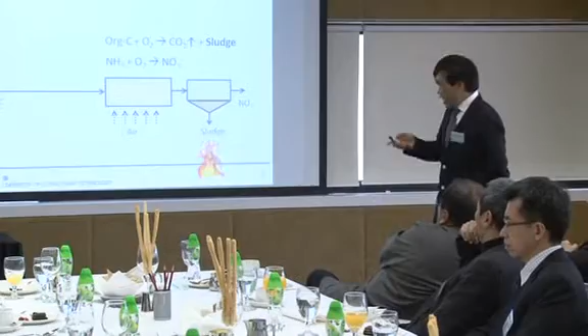Now, I'll give you the background of the innovation. What is the SANI technology? What is the beauty of this SANI technology? Look at the history of the development of 100 years of biological treatment technology. Biological treatment is the main technology of large-scale industrial wastewater and domestic wastewater treatment. The technology was invented by 2 British engineers in 1914, using a very simple, natural way,

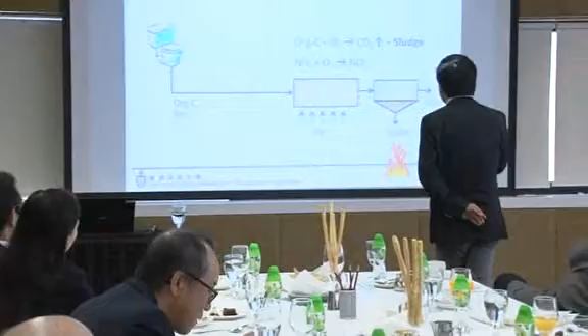pumping air to provide oxygen to oxidize organic pollutants, the major pollutants discharged from us, and to convert organic matter into CO2, which completes the natural cycle. Okay? It's a good idea.

But the problem is that oxygen hardly dissolves. A lot of air is pumped inside. In Cantonese, sai, wasted. Only a few percent is working. Most of it is just wasted. It just goes through without making any contribution. That's the reason it's expensive.

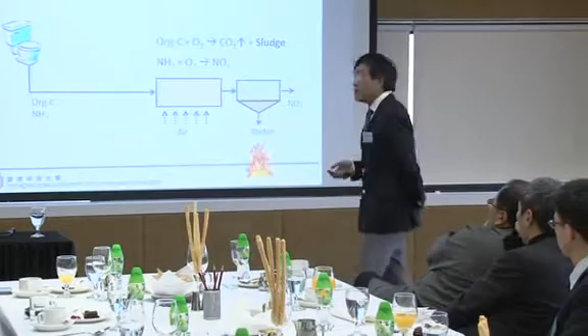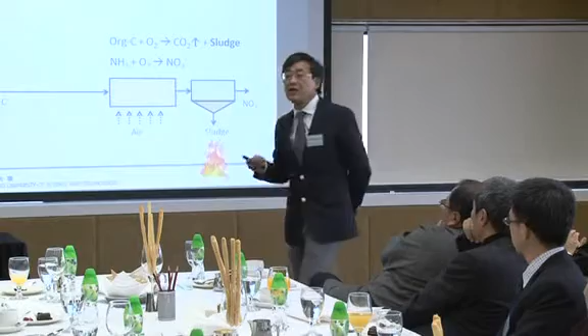Secondly, this conversion, no matter what you do, can only convert 40% of carbon into CO2. The 60% of carbon will stay in the form of sludge. So this conversion is not a beautiful conversion. Energy intensive and half-baked. But it's a natural reaction we know. We can do it easily everywhere, so the technology has been used everywhere, and we know the problem.

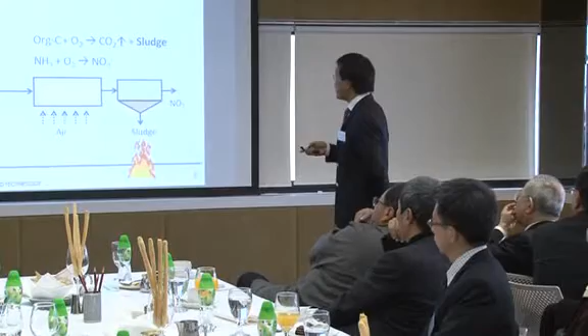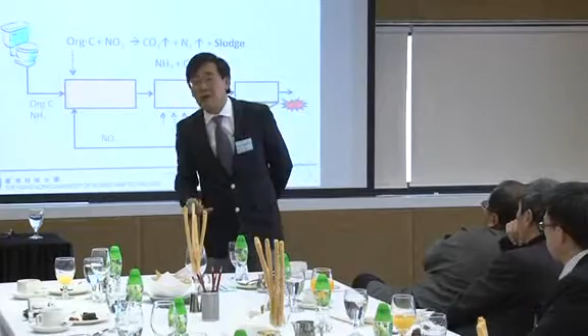And by 1962, a few professors invented another new thing that we can add on: removal of nitrogen, because nitrogen is another major pollutant to our water bodies, causing algae blooms, excessive algae growth. So we can add to this reaction, again using organics, denitrification to bring nitrate from ammonia back to nitrogen gas. Again, it's the nitrogen cycle, a natural reaction.

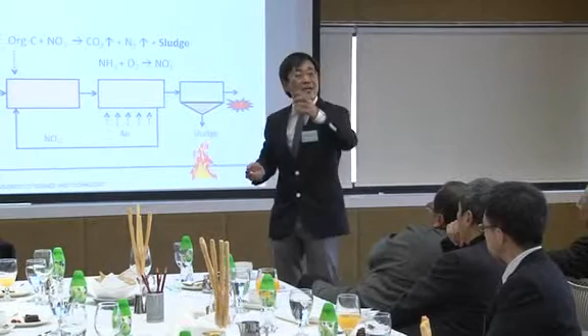And this reaction cannot solve the problem because we still use oxygen. And this reaction again produces a lot of sludge, same as the organic oxidation. Okay?

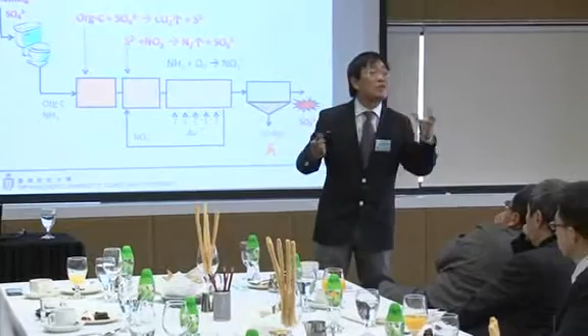Because of this practice, we realized in 2002, can we do something to maximize the benefits of seawater toilet flushing and get green technology developed? Now remember, seawater toilet flushing brings a lot of sulfate into our sewage, causing problems, smelling problems. That is the bad side. We want to turn the bad side into a good side.

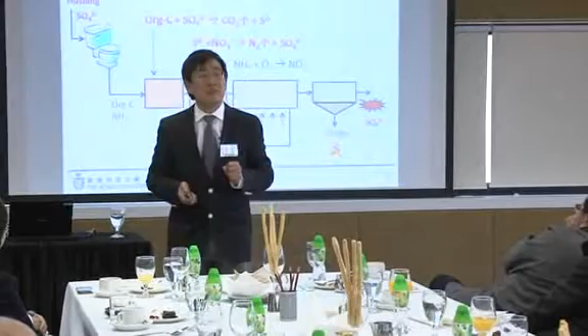Now, the idea is that sulfate can convert organic carbon into CO2 very efficiently. That's the reason we have smelling problems everywhere in sewers. This knowledge has been with us for many years. Of course, you tell me it's already known. Anything new? The new thing is that we can convert this with sulfate into CO2. Why won't H2S be produced? No smell. So the beauty is here. I'll show you later why. And that's what a lot of people forgot.

So when we searched the patents, there are a lot of patents, but none of them hook up to seawater toilet flushing, saline sewage, salty sewage. The product can be utilized in a reaction for denitrification to convert nitrate to nitrogen gas. So we are completing the carbon cycle and nitrogen cycle without being bothered by oxygen. We don't need oxygen. The oxygen here is not from air. You don't need to pump a lot of air. You know what I mean? You solve the problem from the root.

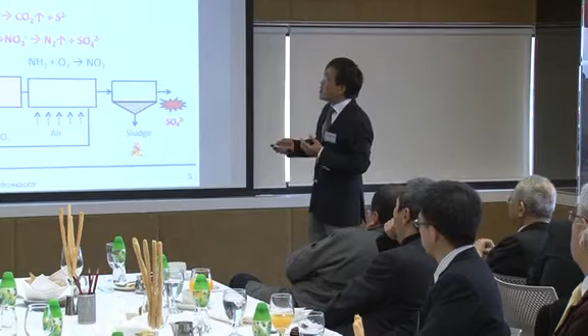And this cycle produces almost no sludge. That's good. I'll show you the reaction equations later. So with this simple idea, making use of sulfate originating from the toilet flushing practice, we can turn wastewater treatment into a green process, saving space, saving money, saving energy, and more importantly, we don't need to worry about the sludge anymore.

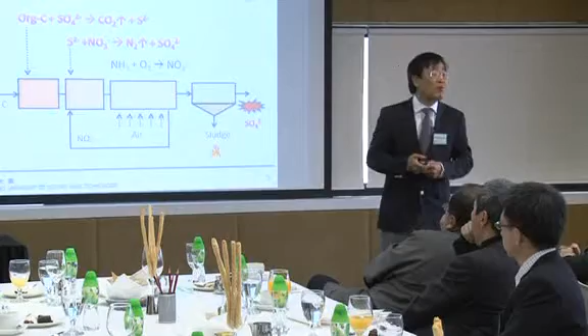That's a huge impact. Okay, so our news was released. I was told by my friend 100 Chinese news websites reported HKUST SANI technology. It's good PR for HKUST. Sure, I think our president will be very happy.

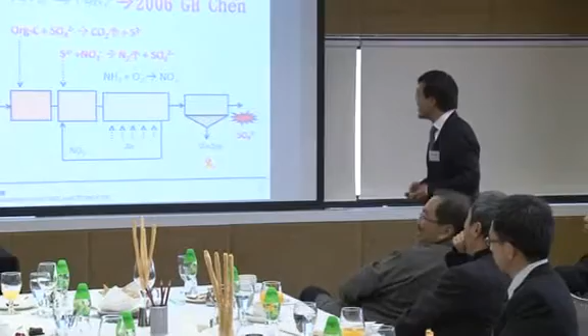So this technology will redesign 100 years of treatment technology because the concept changed, from the 2-cycle idea used for 100 years into 3 cycles. Scientifically, it's new that we're adding this cycle. So everything changed from 2 dimensions into 3 dimensions, from oxygen into these 3 cycles. All the reactions are natural reactions. We don't need any special bacteria. They are all natural bacteria, natural biomass.

However, we can introduce new reactions to realize something new in the practice of wastewater treatment. So the long name of this technology is sulfate reduction, autotrophic denitrification, nitrification integrated process, shortened to SANI. And it happened to be the Chinese name, killing sludge. So very lucky, okay?

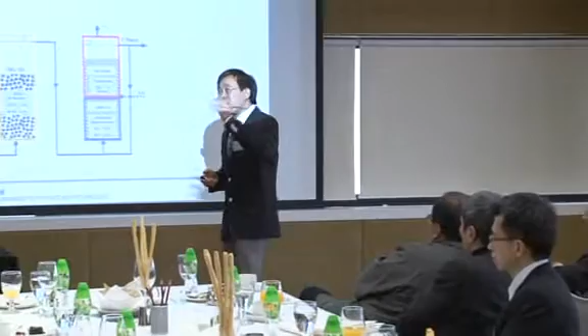What we can do in terms of application technology depends on the concept. If the concept is okay, then we can develop it into a working system, in which we can have 3 reactors. Number 1 is sulfate-based organic conversion under anaerobic conditions, no oxygen. And a UASB, upflow sludge blanket, which is quite a common means of treatment. After that, we produce the sulfide, and the sulfide will be utilized in the reduction of nitrate into nitrogen gas. And then we have this here.

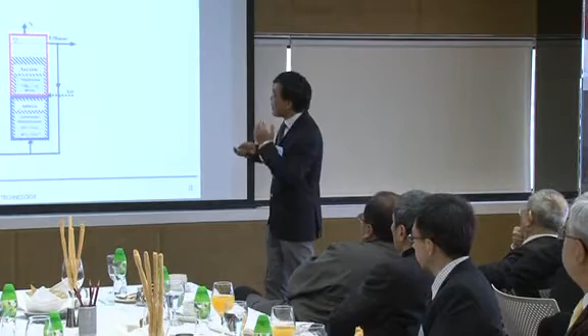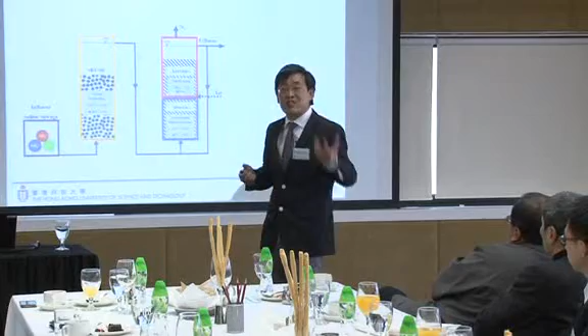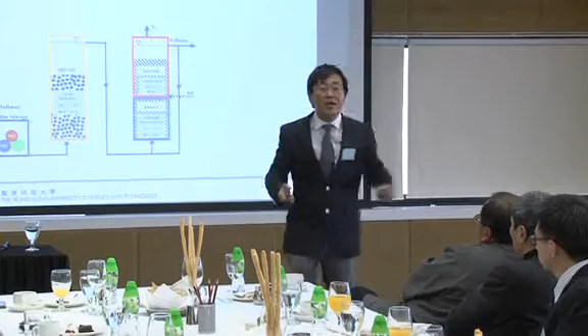So the concept is sulfate from the beginning to sulfate again. You may worry about any problem; no problem, because sulfate is already with us. We just turn it around. We don't produce any harmful byproducts. At the same time, we don't have sludge. We are discharging our treated wastewater into the ocean. No problem, because it's a natural cycle. We have a lot of sulfate in the ocean. If you discharge it into a freshwater body, then you should watch out for the concentration of sulfate. So in toilet flushing areas, no problem. It is a natural cycle. You don't need to jump up and say, oh, any problem?

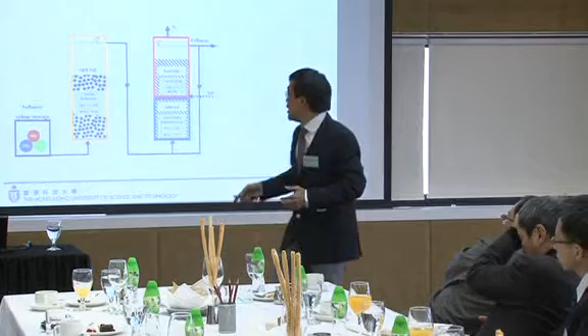No, no problem. This technology, after we tried 3 years in lab scale, we convinced the DSD to give us money to try it at the Tung Chung pumping station for 2 years, with very steady state operation for 205 days, with real wastewater and no sedimentation tank anymore. I just used 3 simple tower type reactors, and the result showed that yes, the concept is correct: we can remove almost 90% of the organic pollutants and 80% of nitrogen, and the effluent water is pretty clean, meeting the discharge standard. The DSD was very happy, even now it's happy. And more importantly, we didn't have any sludge discharged over 2 years.

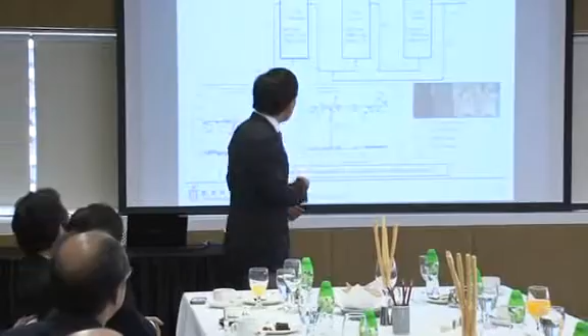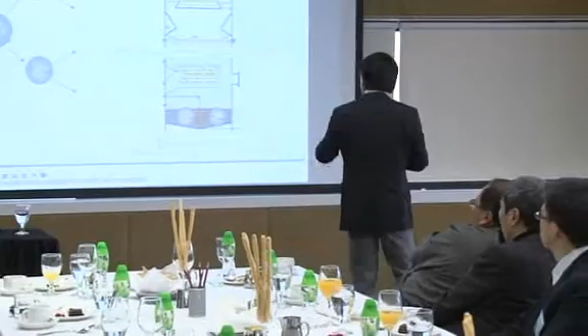Every day we pump in 10 cubic meters. Material never disappears, for sure. What is the fate of those non-biodegradable solids? To answer your question, we can carry out a balance analysis of the solids, dividing them into biodegradable and non-biodegradable, everything covered, and the analysis tells you that something may be out, 15%, most of them decompose again, and finally the sands, 80% sands, stay at the bottom of the reactor for sure. They never disappear. I'm not a magician, okay? But every day, the sludge produced is only 0.63 kilo SS per day, only 2% to 3% of the normal technology.

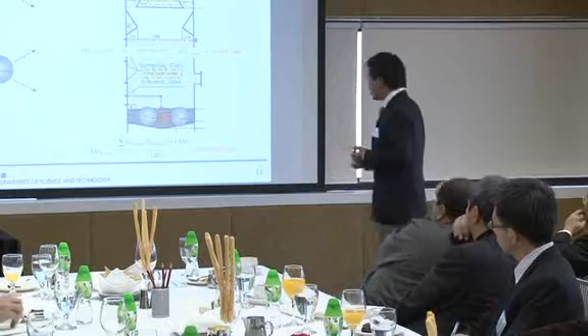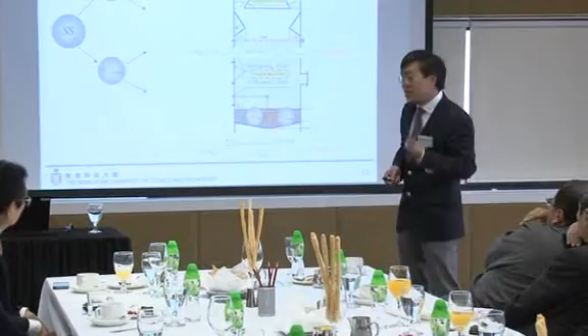So we can take out all the sludge, measure the quantity, and verify that the calculation is a perfect match with the analysis. So clearly, we can convince you that this process technology produces little sludge. Why? Then we can go further. As scientists, we need to write papers to convince a lot of scientists. Because we can show you the reactions. The reaction is here compared with conventional organic matter treatment. Conventionally, treating 100 grams of organic matter will produce 42 grams of sludge. Why does this reaction produce only 1.9 of sludge? Nothing. And it produces an interesting thing: a lot of alkalinity, moving the pH up very high.

This is important, because the high pH will make the H2S produced from the reaction dissolve in water 100%. You don't smell it. Otherwise, this technology is nothing new, no beauty. The beauty is that we have sufficient sulfate because we have seawater flushing. Then we can raise the alkalinity concentration higher to keep the pH higher. So we can have 100% of the H2S dissolved in water and fully use it.

And then you can see the reaction of autotrophic denitrification also produces little sludge, compared with the conventional one, which is about 24 something. So you can compare that all the reactions are slim, not producers of sludge. So we don't need to put in any chemicals. We don't need to put in tricky, fancy bacteria. The natural reaction solves the problem for us. God helps us solve the problem. Okay?

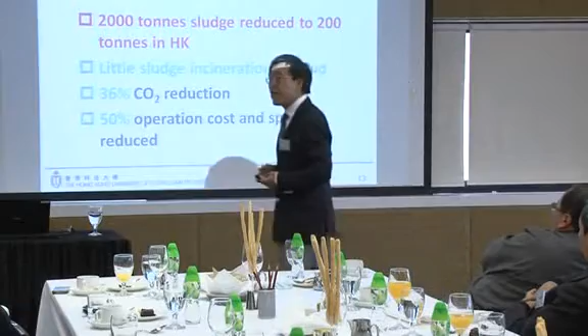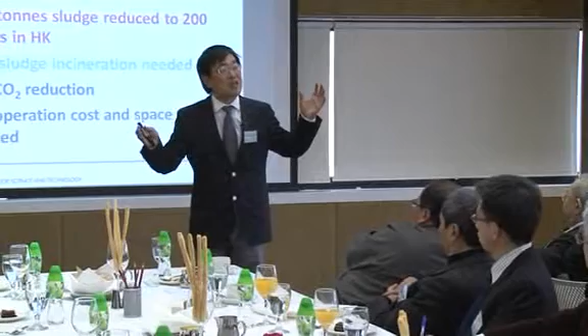What are the benefits of SANI from a perspective for Hong Kong? Only for Hong Kong, we can reduce 2,000 tons of sludge to 200 tons. We are confident that we can reduce 90%. At least our sludge incinerator could be shrunk to a very small one. And most of the sludge from SANI, we verified, can be utilized as construction material because the major components of SANI sludge are sands and inert glasses. No need to burn it even, but I cannot boast too much, otherwise I may not be very much trusted. So I would rather say 90% sludge reduced. And we can reduce CO2 by 36%.

CO2 compared with conventional treatment. When conventional sludge needs to be burned, if we burn only 90%, we can reduce 36% CO2. You will argue that we can use anaerobic digestion of sludge to retrieve some CH4 and recover certain energy as biogas.

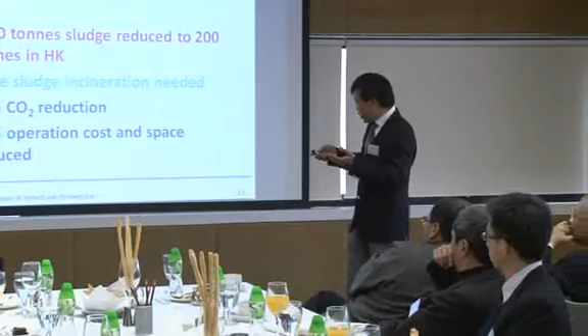But I'm telling you now, that energy is far below what's required for burning sludge. Very little. So if we don't want to burn sludge, or burn very little, then we can reduce a lot of CO2. And for business, we can save space and cost by 50%. That's the reason why DSD is so interested.

Now, DSD wants to go further with demonstration for 1,000 tons in Shatin, in an empty tank, because space there is a big problem. We don't want to disturb the operation of that big scale treatment plant. So we are allowed to use a small area to build a 1,000 ton demonstration plant.

Very tricky one, okay? And now we can have further reduction. We can make the system more sexy. We can develop the sludge into a kind of granulars. I can show you later, I have a sample.

And we can have 3 types of granulars, and we have very powerful granulars. The granular means it settles very quickly. We can combine the settling reaction in one reactor. We can save a lot of space.

This technology has already been well developed in Holland. But we can develop similar new types of granulars to reduce the space, I believe, by 80% of the current version. Make it much more compact and user-friendly.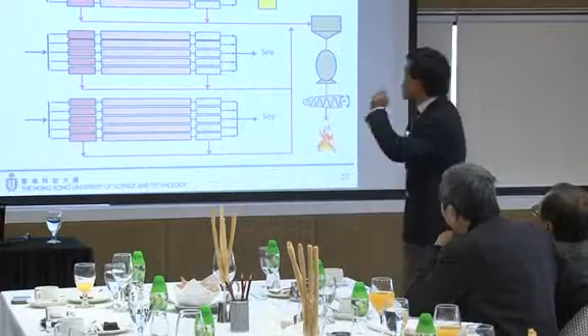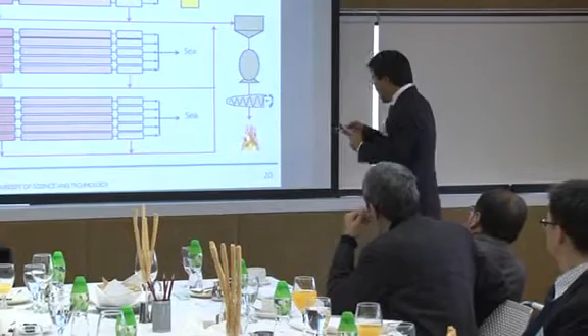Let's do it this way. Fortunately, most treatment plants are built along the coastline for easy discharge. That's okay. We can only reuse about 30% of the effluent at most, because we cannot reuse water everywhere unless you put in RO, which is very expensive.

So we only have one third of effluent that can be reused for irrigation, landscaping, car washing, street washing, wherever. And we can turn this idea around. Let's do it this way: we keep the 30% as it is, don't change it, and pump the other two thirds of seawater from the coastline into the treatment plant.

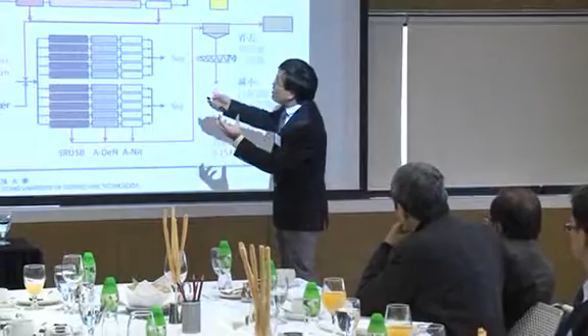The cost is nothing, over 10 kilo, we calculated, just for abstraction and sending the seawater into the treatment plant. This turns the treatment plant into SANI, and the sludge from here can be handled together. So we solve the sludge problem for existing freshwater wastewater treatment plants without being bothered by seawater toilet flushing. As long as it's located around the coastline, we can reduce 50% of energy.

We can reduce the sludge part, eliminate the sedimentation tank. You can think about how much space can be saved. So now I'll stop talking about SANI and move to another topic.

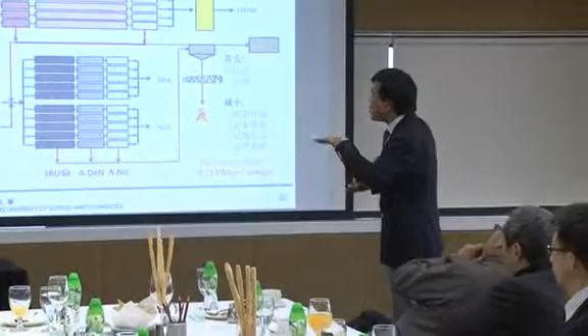But it links back to SANI, because in the last 10 years we also developed a fantastic new technology called membrane technology, which I know Ms. Eto is doing, and many companies are doing. In the last 15 to 20 years, this is the most advanced technology in the world, which means we put the membrane into the reactor to eliminate any need for a clarifier or sedimentation tank, to reduce space, and to solve sludge bulking trouble. And we really did invent a lot of membranes.

But unfortunately, all membranes in the world get clogged. You have to take it out, or put in chemicals to wash it every 2 to 3 months. It may not be very costly, but it looks somehow tricky and troublesome, and it will affect the lifespan of the membrane.

And we developed a technology we call low-cost membrane and no-fouling membrane, it never fouls. This is the first Chinese technology of MBR. We already presented it, but we will disclose the patents because we applied for an American patent. So you will get to know what it is, for sure.

But this technology can be applied not only for airports, but for everywhere, okay, and maybe in Saigon, I don't know. The beauty is that this technology has 100 times higher permeate flux.

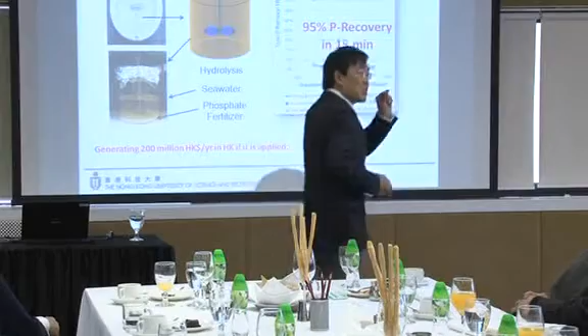Because every year the price increase of phosphorus is higher than gold. You don't need to buy gold, buy the future of phosphorus. Remember, phosphorus will disappear, no way around it. How much money can we bring to Hong Kong if we apply this? We can produce at the moment 200 million Hong Kong dollars per year.

Wastewater is a resource, it's nothing else. And going much wider - what is the future of Hong Kong? A smart water system for the future of a coastal city, which Hong Kong Airport is doing excellent work on. They developed 3 water systems.

Fresh water, seawater, clear water - we can put them together, turn them around, and save 50% of water resources, much higher than the 20% from seawater alone. This technology can combine with the super technology.

Finally, we can use sludge together, so we can solve a lot of problems. This means I no longer call this technology green - I call it blue water technology, because we use seawater. This HKUST blue water technology can save the earth.

We can save so much water, so much electricity, and recover so much phosphorus. I'll take this opportunity to acknowledge my major collaborators in Holland, in South Africa, and all my teams.